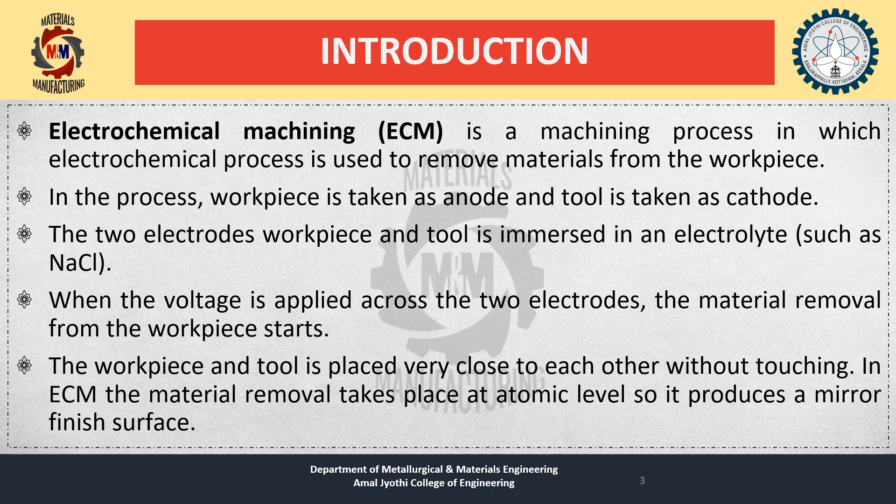It is normally used for mass production and for machining extremely hard materials, or materials that are difficult to machine using conventional methods. Its use is limited to electrically conductive material.

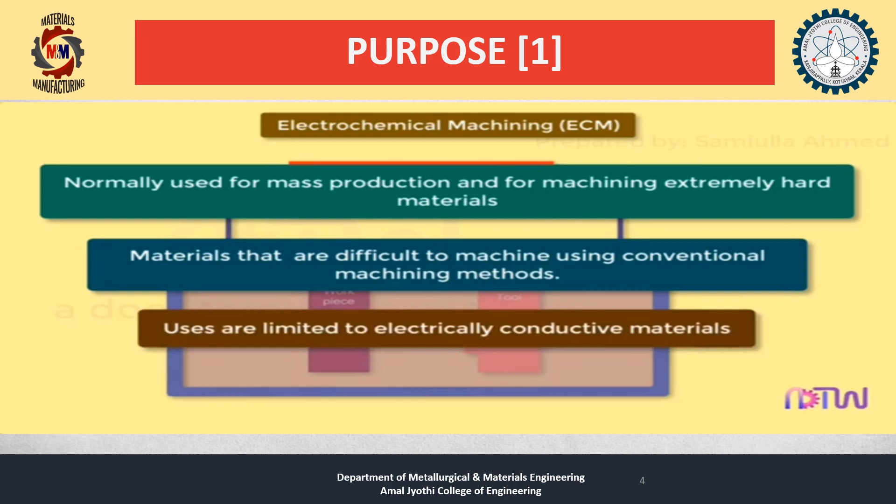Next is the principle of electrochemical machining. The major principle is based on Faraday's law of electrolysis, which states that when two electrodes, anode and cathode, are placed in an electrolyte, the mass of metal deposited on the cathode coming from the anode is directly proportional to the quantity of electricity passed through the electrolyte.

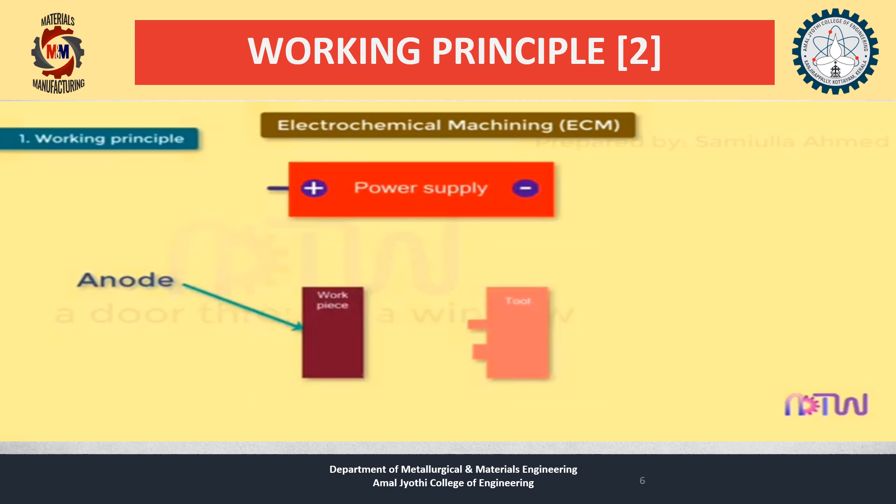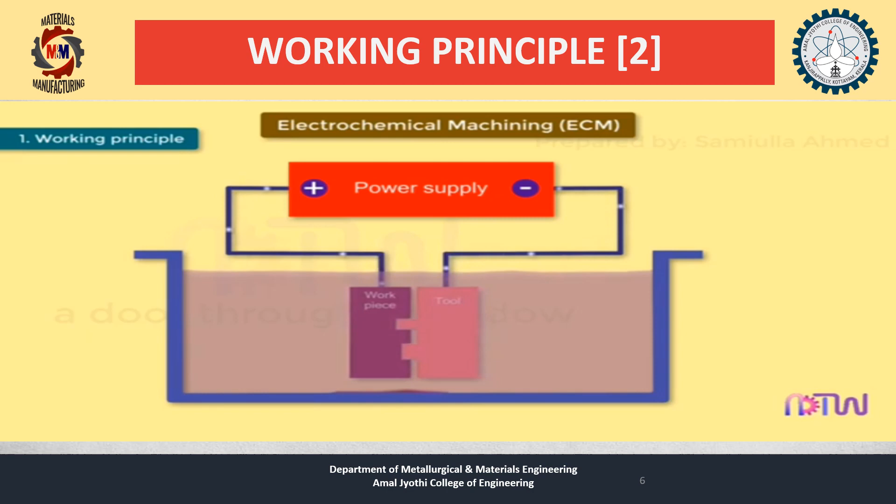Whenever the two electrodes—anode connected to the positive terminal and cathode connected to the negative terminal—are immersed in an electrolyte such as NaCl, and a voltage is applied across them, material removal from the anode starts. The anode and cathode are placed very close to each other without touching. In ECM, material removal takes place at the atomic level, producing a mirror finish surface. ECM working is opposite to electrochemical or galvanic coating.

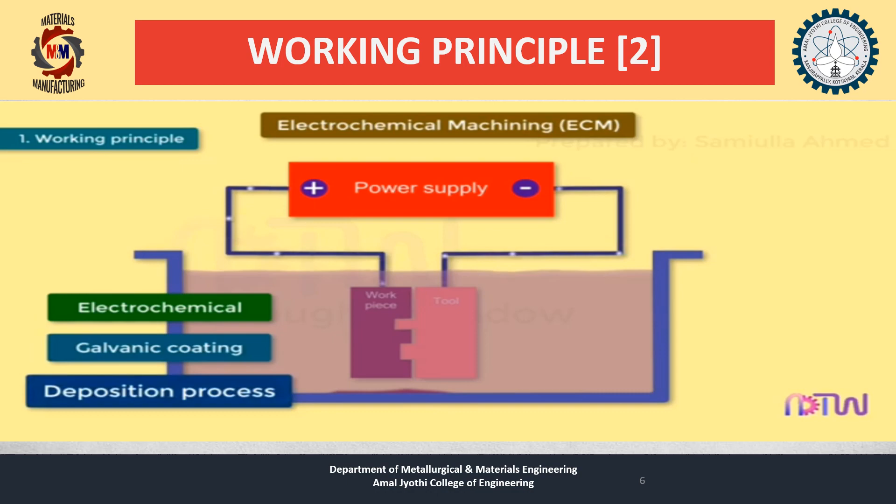Next is the conceptual electrochemical model. In this model, NaCl is used as the electrolyte, the workpiece is placed as the anode, the tool is used as the cathode, and a potential difference is applied. There is a very small gap between the workpiece and the tool for removal of material.

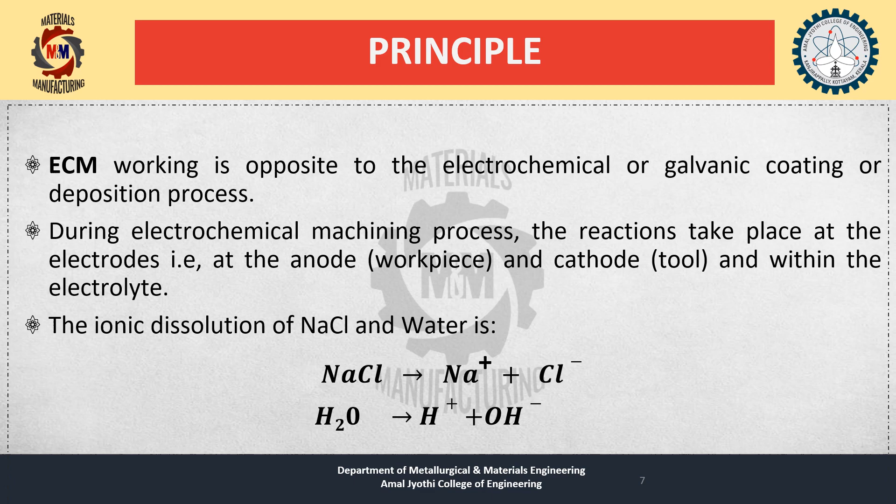As soon as a potential difference is applied between the anode and cathode, ions start moving from anode to cathode. Negative ions are attracted towards the workpiece, placed at positive potential, and positive ions are attracted towards the tool, placed at negative potential. The chemical reactions in the basic process of electrochemical machining are as follows: NaCl gives Na+ and Cl-, and H2O splits into H+ and OH- ions.

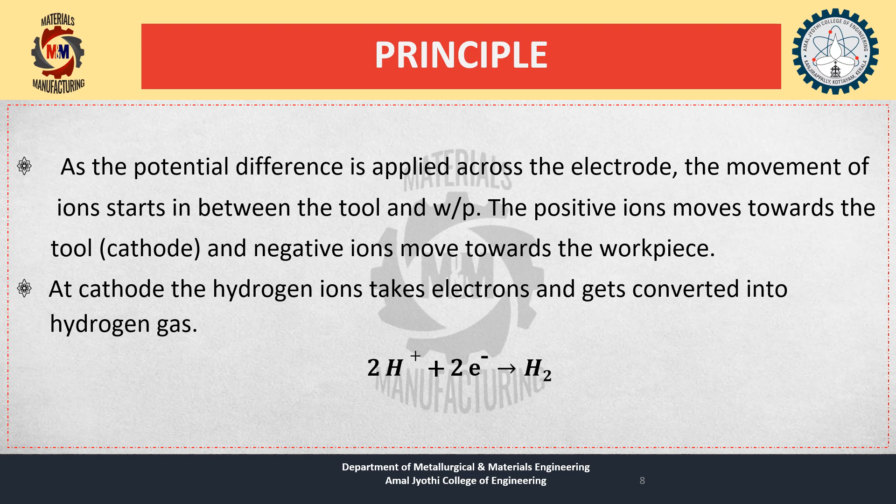The next major reaction is 2H+ plus 2 electrons gives H2. The hydrogen ion gains an electron and gets converted into hydrogen gas.

Next is the construction of the electrochemical machining setup. The ECM system has the following modules. First is the power supply, the source of energy provided to the setup. It is generally a DC battery with a potential difference from 3 to 30 volts, depending on requirement.

Next is the electrolyte, a salt solution in which the workpiece and tool are kept during machining. It acts as a current-carrying medium between the workpiece and tool, helps remove waste products from internal gaps, and also acts as a coolant by preventing overheating of the tool and workpiece.

The next thing is the tool. The tool, or cathode, used in ECM is one of the electrodes. It is also shaped to the desired form into which the workpiece is to be cut. The tool used in ECM should always have accurate dimensions.

The fourth one is the mechanical system, one of the most important elements in electrochemical machining. It is used for the advancement of the tool, perpendicular to the workpiece, at a constant velocity. The fifth one is the tank.

The tank contains the electrolyte, tool, and workpiece. All the reactions take place here. The next one is the pressure gauge, used to measure the pressure of electrolyte supplied to the tool.

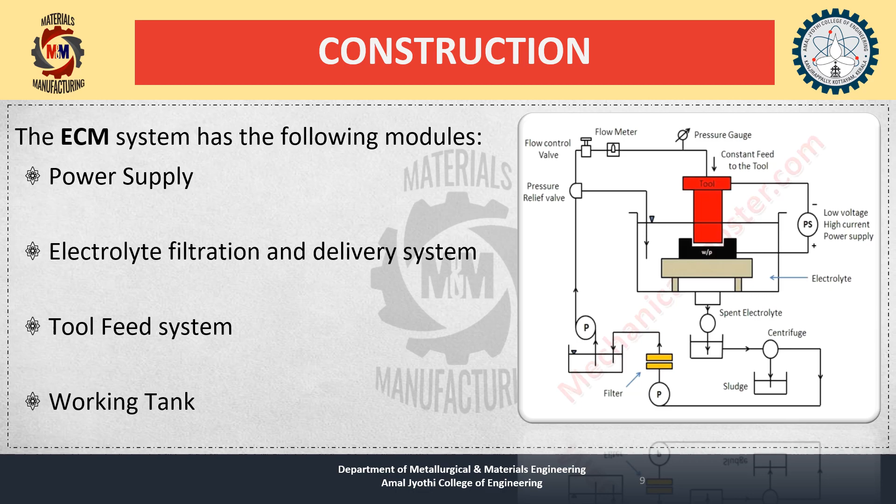Next we will deal with the working of electrochemical machining. The working starts with the advancement of the tool towards the workpiece. The tool and the workpiece are kept in a suitable electrolyte with a very small gap between them.

As soon as the potential difference is applied, that is DC current, the workpiece starts behaving as an anode and the tool starts behaving as a cathode. When the condition of electrolysis is fulfilled, the removal of metal from the workpiece starts, and the removal takes place according to the shape of the tool.

Material is removed from the workpiece and gets settled down in the form of sludge, which is due to the flow of electrolyte. The electrolyte then goes through a filtration process. In this process, the electrolyte is passed through a centrifuge where the sludge is removed, then through a filter where other remaining impurities are removed.

If there is an increase in the pressure of the electrolyte, the pressure valve deviates the flow of electrolyte directly to the tank.

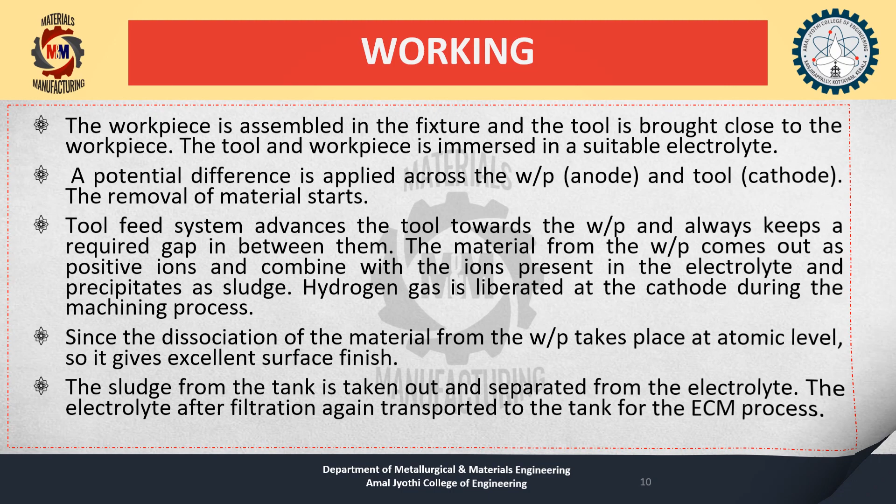First, the workpiece is assembled in the fixture, and the tool is brought close to the workpiece. The tool and workpiece are immersed in a suitable electrolyte. After that, a potential difference is applied across the workpiece, which is the anode, and the tool, which is the cathode.

The removal of material starts, in the same manner as discussed in the working principle. The tool feed system advances the tool towards the workpiece and always keeps a required gap between them.

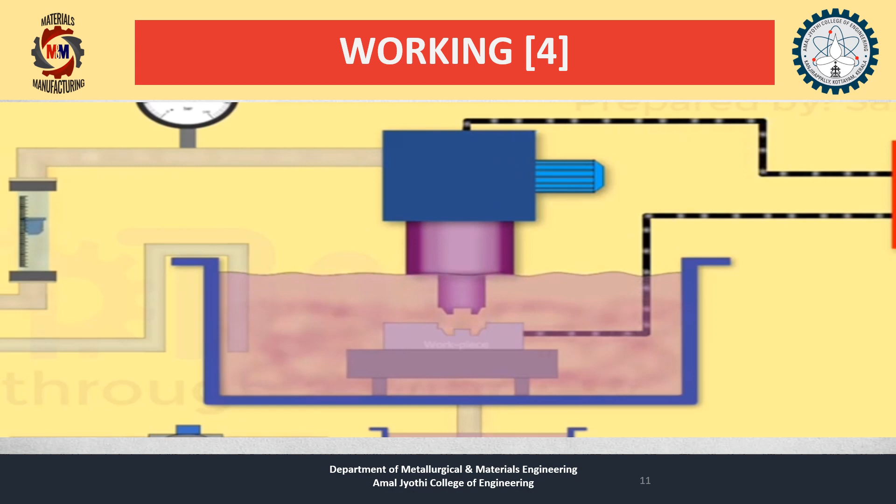The material from the workpiece comes out as positive ions and combines with the ions present in the electrolyte, precipitating as sludge. Hydrogen gas is liberated at the cathode during the machining process. Since the dissociation of material from the workpiece takes place at the atomic level, it gives an excellent surface finish.

The sludge from the tank is taken out and separated from the electrolyte. The electrolyte, after filtration, is again transported to the tank for the machining process.

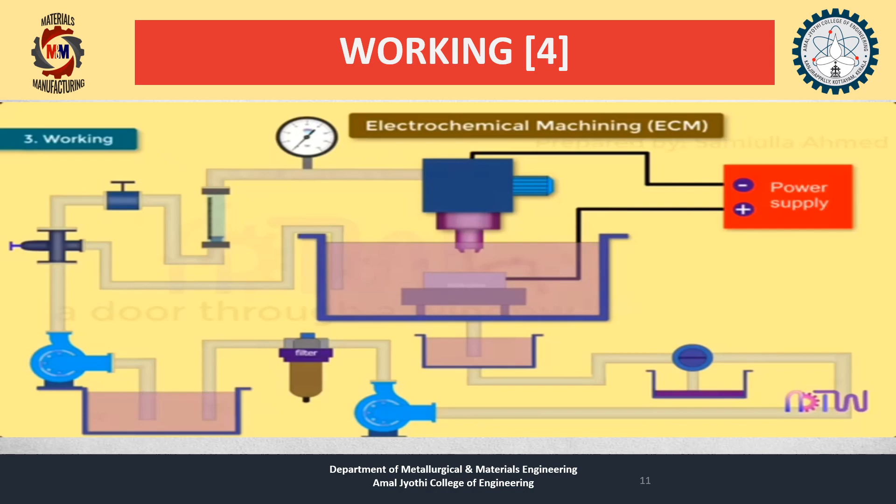Next are the applications. The main applications of ECM are grinding, steam turbine blades, drilling, profiling and contouring, and die sinking. ECM is used for heavy machining of hard materials which cannot be machined using conventional methods.

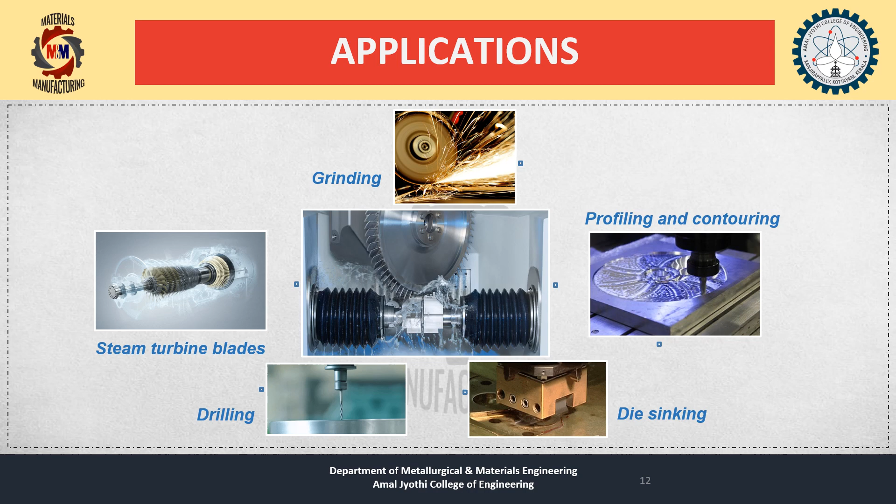Due to its high accuracy and surface finish, ECM is used for micro machining. As there is no contact between the tool and workpiece, the final product obtained is accurate at the atomic level. ECM is also used for the production of very small gear systems which cannot be machined using typical machining processes, and for machining turbine blades, as they are difficult to machine due to their complex concave structure.

The major advantages of electrochemical machining: it is suitable for hard materials. The ECM process is used for machining hard materials, and those materials which are difficult to machine using typical processes are machined by using electrochemical machining.

The next advantage is negligible stresses. Unlike any other machining process, in electrochemical machining there are no stresses produced, as there is no contact between the tool and the workpiece. The next advantage is no heat produced.

There is negligible heat produced in this process of machining, as there is no friction involved in electrochemical machining. The next advantage is no tool wear. As there is no friction involved and no heat produced, the tool is not subjected to any stresses.

The next major advantage is surface finish. The surface finish obtained in electrochemical machining is excellent. Mirror finished surfaces can be obtained by this process, due to the removal of material at an atomic level.

The other advantage is accurate dimension. Accuracy is very important in most industries. With the help of electrochemical machining, we can obtain accurate dimensions because the electrochemical process involved works at the atomic level.

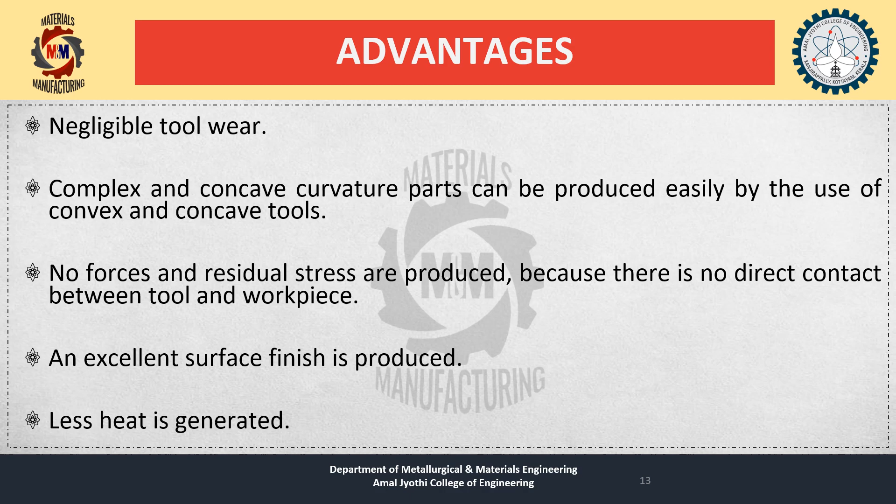The next advantage is mass production. The electrochemical machining process is generally used for the mass production of machine parts. This is because of various factors like the electrolyte can be reused, no tool wear, no heat produced, etc.

Next are the disadvantages of electrochemical machining. The first disadvantage is higher cost. The cost of electrochemical machining equipment is much higher compared to other machining processes, and the cost of maintenance is also high in the case of ECM.

The next disadvantage is corrosion. Generally, the parts machined using ECM are metals. We know that metals are electropositive and get corroded when they come in contact with a liquid. Hence, there is a chance that the metal workpiece may get corroded due to the electrolyte.

The third disadvantage is large area. An ECM setup consists of various individual parts. Due to so many complex working parts, an ECM setup requires a large area, making it difficult to install the setup in a smaller area.

The fourth disadvantage is limited materials. One major drawback of ECM is that only materials which are good conductors of electricity can be machined. Semiconductors and bad conductors are not suitable for machining through ECM.

The fifth disadvantage is that it is hazardous to the environment. The reuse of electrolyte can be done for a limited cycle. After a certain time, there is a need to dispose of the electrolyte and sludge produced in the process, and the waste products produced in the ECM process are harmful to dispose of.